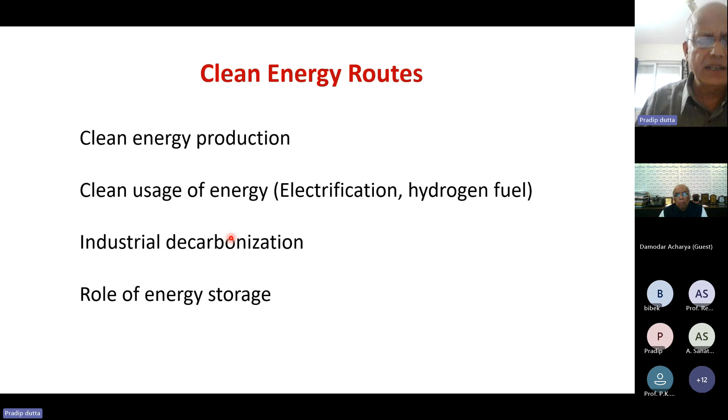Now, when it comes to clean energy production, from a universal point of view, there are these COP meetings held every year. One meeting, COP 29, got over just last week in Azerbaijan, and this was COP 28. Resolutions are taken, agreements are signed, and at COP 28 in 2023 in UAE, the resolution was the beginning of the end of fossil fuel.

So this was, and there was an aggressive push for renewables, and a target date has been set for phasing out fossil fuels. And even in other conferences, like the Solar World Congress held in Delhi last year, there was a special roundtable theme called 'Moving the World Towards 100% Renewable Energy.' Now, all these are easier said than done, that shifting from the usual energy sources to the completely renewable energy source - it's not so simple.

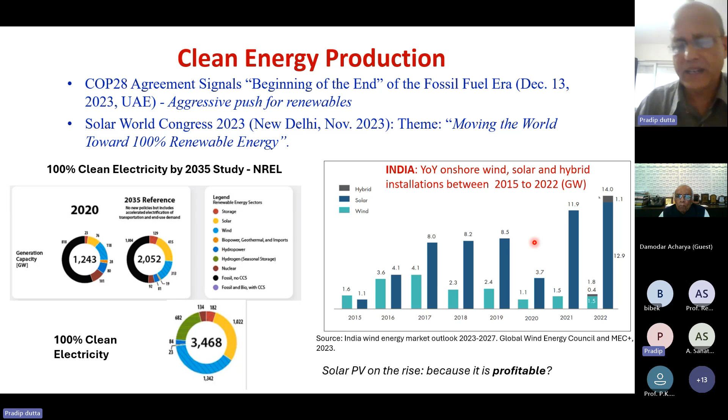Now, what is the real cost of renewable energy? Because what we've seen here, it's just that because the cost of solar panels went down, the investments went up. Now when we talk about cost, we should not forget what is the real cost of renewable energy, because the real cost is not the cost that we are paying. Of course, the source of the energy is free.

Now when we talk about cost of renewable energy, the governing principle comes from our good old second law of thermodynamics. Why does that happen? Because energy is not just energy in terms of watts or joules or kilojoules - it has a quantity as well as a quality, which means there is a grade. With renewable energy, because of the very low intensity of solar radiation or wind speeds, they are classified as low-grade energy and electricity. To convert them to electricity, which is the highest grade of energy equivalent to work - because it's in the form of work that we use electricity in vehicles and other motive applications - we have to convert from low grade to high grade. So the efficiency can be quite low, limited by the second law. It's not just in thermal, but in every other way - the same principle applies differently.

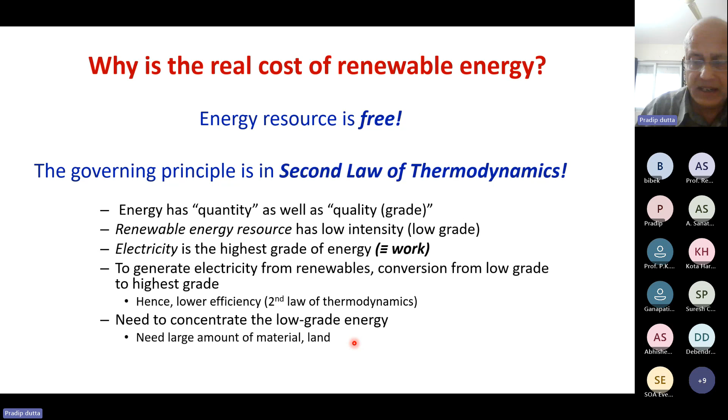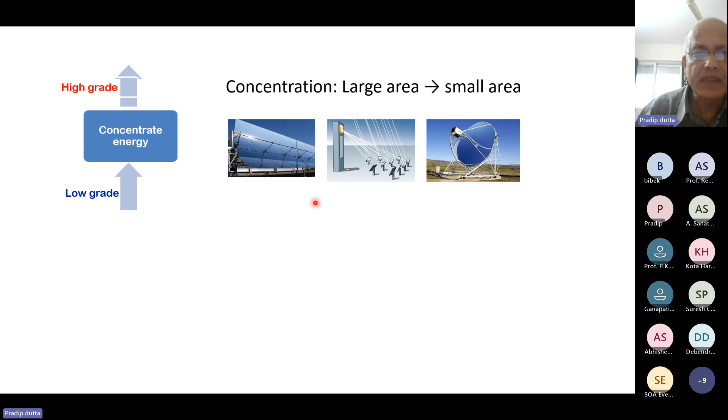So we need to concentrate the low-grade energy to convert it to high-grade energy. This requires large amounts of land and large amounts of material. For example, in solar thermal, it's easy to understand concentration: we have low-grade sun's rays, and we concentrate the energy to bring it to high grade, meaning we use big solar collectors. High temperature is produced, and that high temperature is used to generate electricity, the highest grade of energy, with some factor called efficiency.

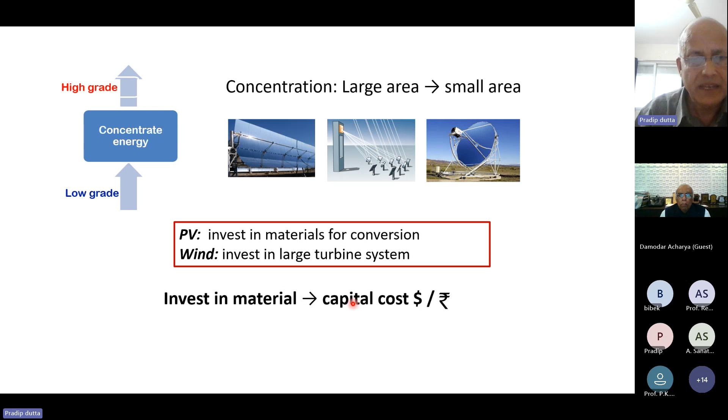The same thing applies in photovoltaic - we're converting low-grade solar photons into electricity, so we have to invest in materials for the conversion. Similarly, with wind, we invest in large turbine systems which catch low-grade wind energy and convert it to high-grade by concentrating it right where the rotors are. So we need to invest in material, and this gives rise to capital cost, in dollars or rupees or whatever. It is this capital cost which determines the cost of the energy that we are paying for.

When we evaluate energy cost, we use what's called levelized cost of electricity. For fossil fuel, it is mainly driven by the cost of the fuel and less by the cost of the infrastructure or power plant. Whereas for renewable energy, the fuel cost is zero, and the running or operation and maintenance cost is much lower compared to the initial capital cost, since you have to invest in the material. So if a plant is designed for a life of about 25 years, the cost per unit of electricity we pay today is the levelized cost over the entire lifetime of that plant. That's what we have to keep in mind, as far as cost is concerned.

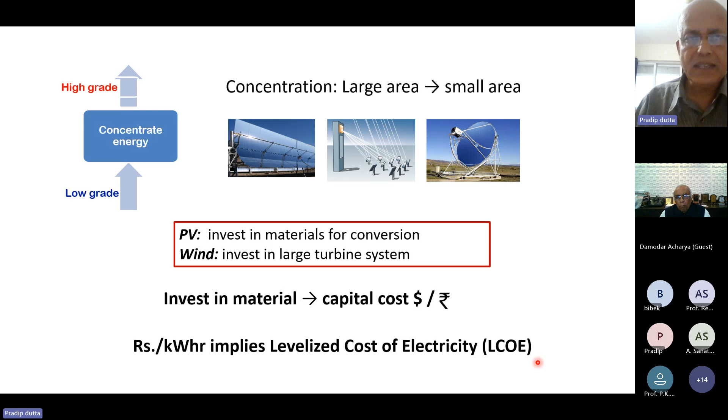Now, if you look at how the levelized cost has changed since 2009, solar panel cost was quite high at that point, because solar PV was expensive. In fact, wind was much better, and solar thermal was actually more attractive than solar panels. But around 2011, mainly because of scaled-up production in China, efficient supply chain management, and subsidies given, without any real new technology for solar PV, a well-proven polysilicon based solar PV was scaled up. This brought down the cost drastically. Of course, their planning had started at least 10 or 15 years before this.

Once the price dropped, investment in solar panel based big PV plants picked up, and that is where we are today. Wind has been steady in that sense. So what this means is that the trend where the world is going is based on the levelized cost of energy. But what is the real cost to the environment? That is rarely taken into account.

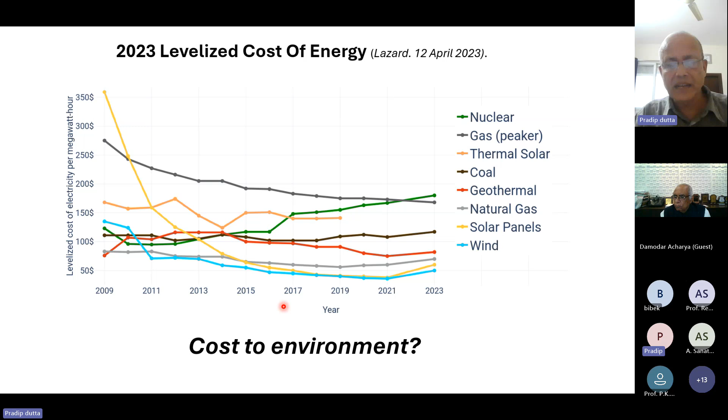One metric of sustainability is energy return on energy invested. There are other metrics as well to evaluate the sustainability part of it, not just the cost we pay out of pocket for energy. Energy return on energy invested is the energy that a plant delivers over its entire lifetime divided by the energy required to deliver that energy.

When we say energy required, it means right from mining of silicon, processing, all the way to production of the panel, and then the entire circular economy, including recycling. That is the energy required over its entire lifetime, based on a life cycle analysis. This is compared with the energy that is delivered over the lifetime. So anything more than one means it has delivered net energy.

But more than one is not enough, because then the whole exercise is a zero sum. This EROI should be much more than one in order for it to be a successful and sustainable energy source. We need this EROI to be much more than one.

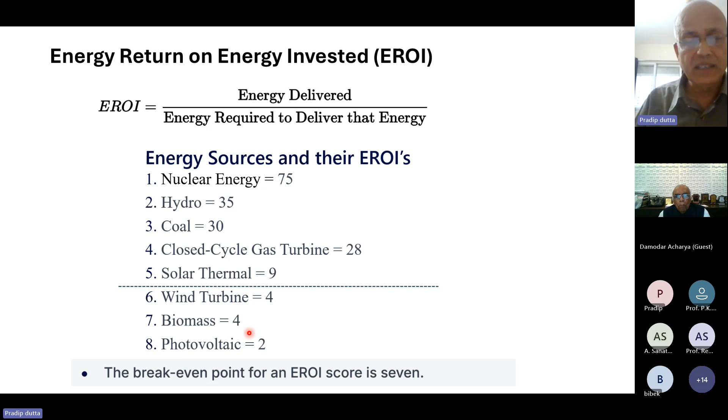The break-even point from what social scientists analyze should be 7 or more, which means these score much better. But we are now moving on with the others, because the LCOE, the levelized cost of energy, is proven to be better in this case.

Going back to this LCOE, levelized cost of energy, if you look at nuclear, it is quite high and going up, largely because of environmental regulations and because it is not well scaled up in the supply chain. So this has to be pushed up. In our union budget declared this year, there was a big push for small modular reactors.

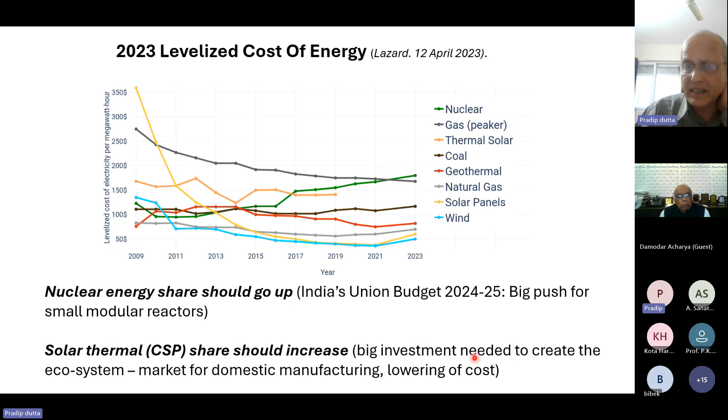Worldwide, many countries are thinking of increasing the nuclear share in their energy mix. Now, solar thermal is another one which should increase, but it needs big investment. It does not necessarily need new technologies, but new technologies can improve performance. It needs big investment like what PV had, to create the ecosystem and market for manufacturing to lower cost.

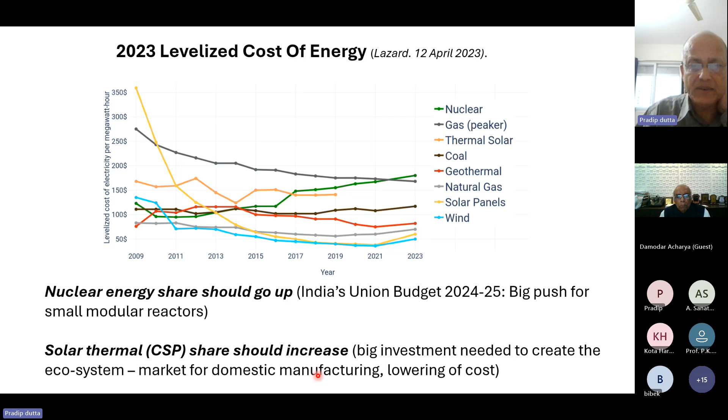And already China has started that initiative. In the past 7 or 8 years, they have been working on it in CSP, trying to replicate the PV story. This is not very well known to everyone, but if one looks at this...

Source is NREL, they have shown in their document that there are many plants coming up in the Gobi Desert of China, where it is quite cold and the solar DNI is quite high. So it's an ideal combination. What they are doing over there, instead of creating a big solar thermal power plant on its own...

From a cost point of view, solar PV is quite beneficial. So the large part of the plant is actually solar PV, and a smaller component, but with nearly about 24-hour storage. So PV is without the storage, and this is with the storage, right?

So what you see as 100 megawatt is actually producing energy 4 times that compared to, I mean, the nameplate energy capacity here is 600, but it will produce 600 without the storage, which means only 1/4 or 1/3 of the day it's operating, whereas this will be 24 hours.

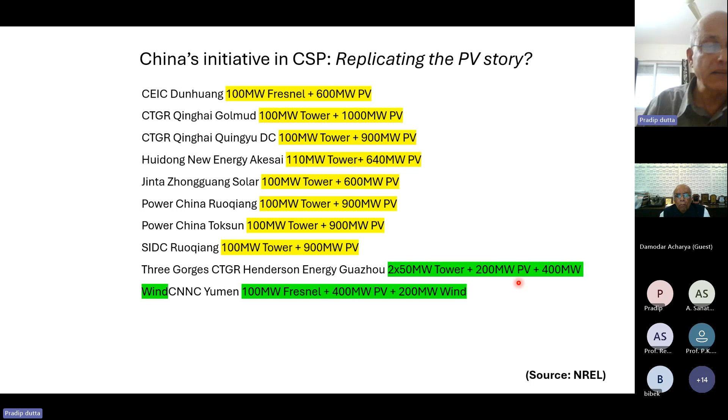With that, let me shift a little bit of time to spend about our own research at IISc, which we have been doing towards solar thermal.

Just a few slides on a new power cycle, the supercritical CO2 Brayton cycle. This basically is a new cycle of power plant to replace steam-based power plants, for higher efficiency and modular in nature. They are scalable and ideally suitable for nuclear, solar thermal, and waste heat recovery. One can have higher efficiency, smaller footprint, lower cost, eventually when it is productionized. So these are the advantages.

So we have built - Professor Pramod Kumar, who is also a fellow, has developed this in his lab. It's the first fully working Brayton cycle test bed for supercritical CO2, in fact the only one in the world which is working end to end.

Otherwise, in Sandia National Lab, they have only the compression part which is working. And there are other parts in the world, like Australia, Germany, they are working only on limited parts of the cycle. But this is the first fully working Brayton cycle test bed, and an important part of it was the development of turbo machinery.

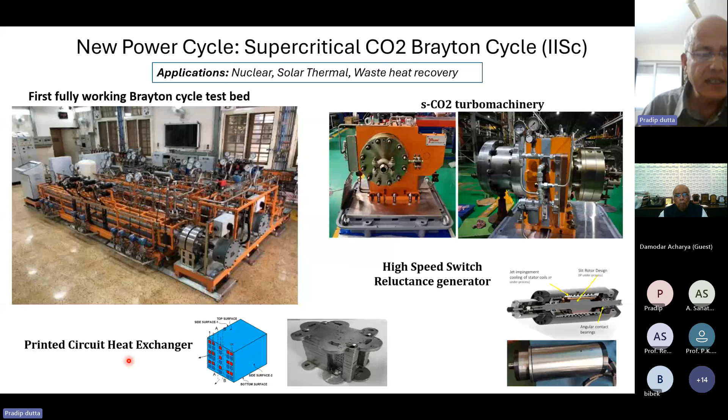The corresponding generator has also been developed. It's a switch reluctance generator. This was part of the IMPRINT project.

Also developed were printed circuit heat exchangers, which are required for supercritical CO2 Brayton cycle. There are only two manufacturers in the world: one is Heatric in UK, and the other is Vacuum Process Engineering in US. The cost is very high when you want to order anything from them. Now that has also been indigenized with the help of support from DRDO and other agencies.

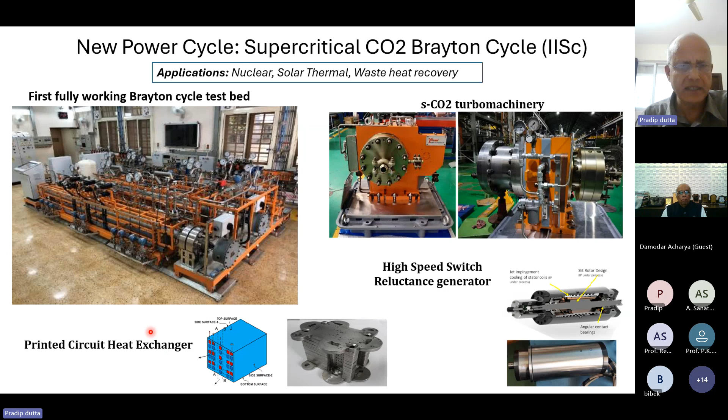That manufacturing process has also been developed, as well as the design process of such heat exchangers. So these are some of the ventures, and also the high temperature receivers.

We also had some projects under the Indo-US program, and then through MNRE, we have developed a high temperature, high flux solar simulator. This is a high flux solar simulator with a concentration of nearly 500 to 1000 that can be achieved. It's only about 2 kilowatts of heat generated here, but with concentration.

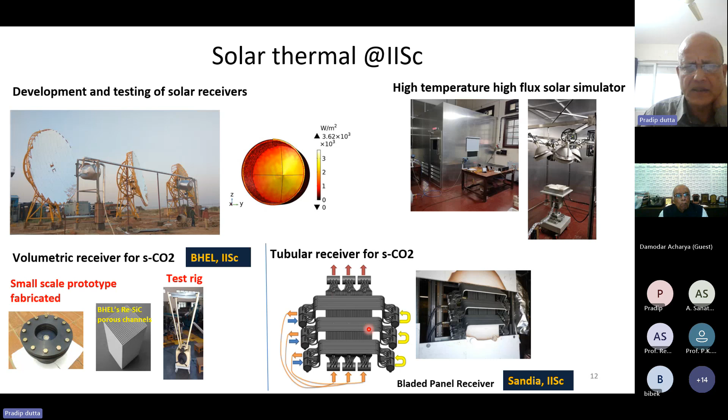And then with BHEL, we have developed high temperature solar receiver material. These are ceramic based. And with Sandia National Lab also, these supercritical CO2 receivers. With BHEL, we have also developed other receivers at IISc. I will not spend too much time on these right now.

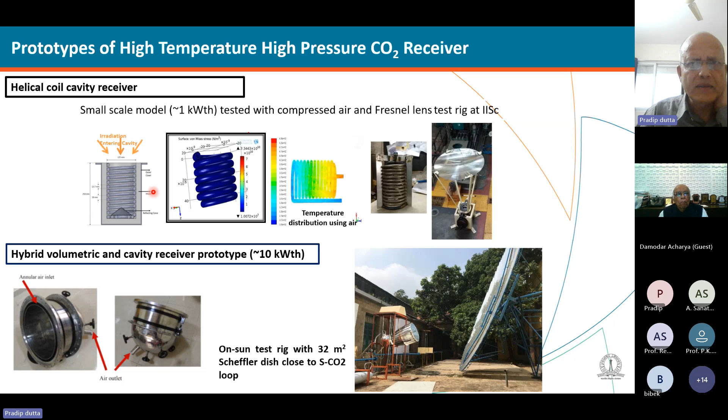But with BHEL, we have also developed high temperature thermal storage systems. These are also ceramic based, using natural mineral-based materials like mullite, and they have been tested for charging and discharging. So these are some of the things that we've been doing.

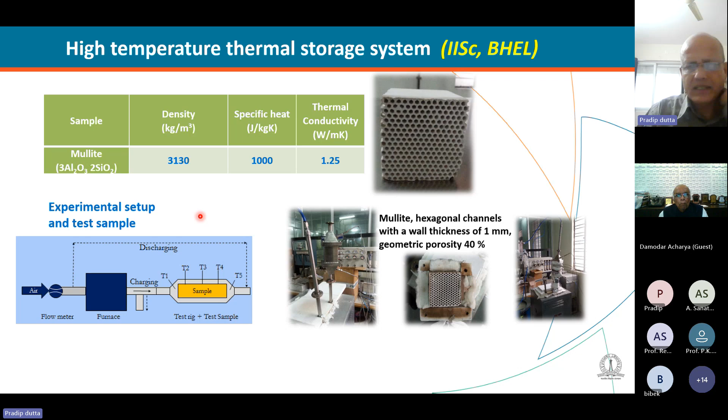So when you're talking about energy decarbonization of the industry, this is another big opportunity for core sector engineers, especially for Indian industries. We have started the process, but it's a long way to go now. So the processes, something like a steel plant for instance, moving from a carbon-based approach like the coke-based one, to something like hydrogen or electric arc furnace at large scale, is a big change.

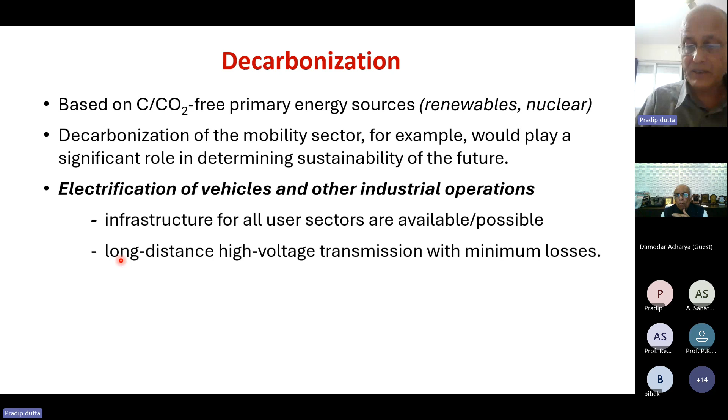The reason is that for electrification, the infrastructure for all the user sectors is available or possible. Long distance high voltage transmission is also there. So if you generate green electricity through renewables, it is possible to have access to that electricity at every place because of the infrastructure that is already there.

But when it comes to transportation, for instance, and we are talking about EVs, one thing I would like to highlight is what are the new opportunities. The shifting from IC engine vehicles to other forms like EVs or hybrid EVs doesn't necessarily mean that an engineer like a mechanical engineer would lose jobs, because this is the kind of notion that has been there, and as a result young people are suddenly thinking that they have to leave their field. But actually, more such opportunities are coming.

Because if you see the advent of electric vehicles, what we need is basically the development of electric drives and power electronics. This is predominantly for electrical engineers and electronics. But the vehicle engineering is predominantly for mechanical engineers.

Structural engineers are also there, thermal too. In EV, there is a big role for thermal management, and that's something we've been working on for the past few years.

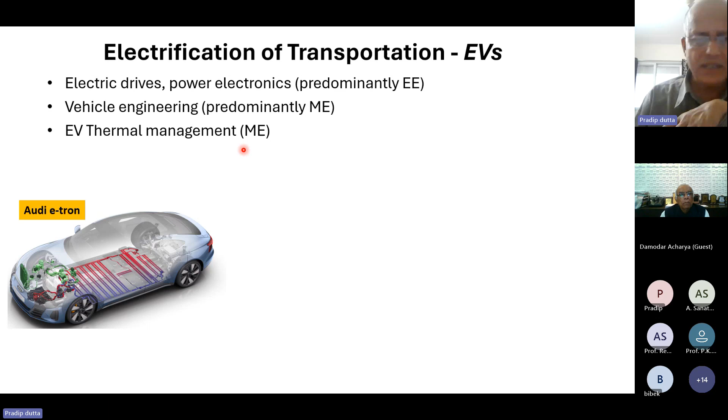For instance, if you look at a common architecture at the system level, this entire thing is not just thermal management, it's basically energy management. Because storing all the energy in the battery is one thing, but how the rest of the vehicle uses it, from cabin cooling and heating, to battery cooling and heating, to powering all the systems, is another. So there's a system level energy management, and at the component level, one has to develop new types of heat exchangers, pumps, compressors, fans, valves, and the controlling system. So this has actually given us more work than before, opening up new opportunities.

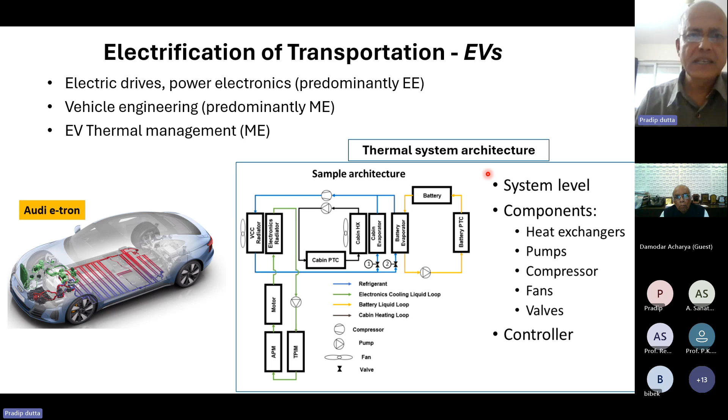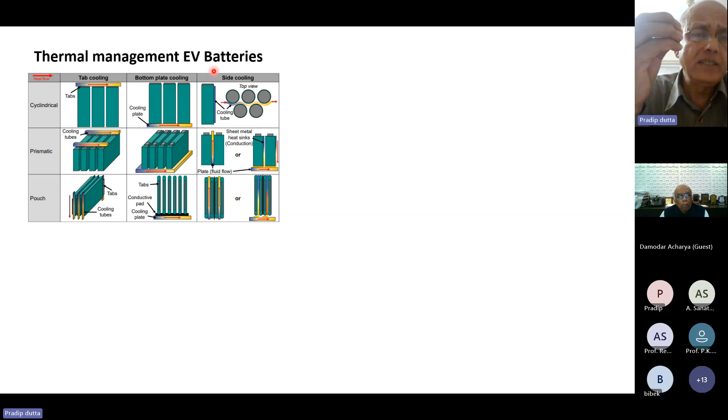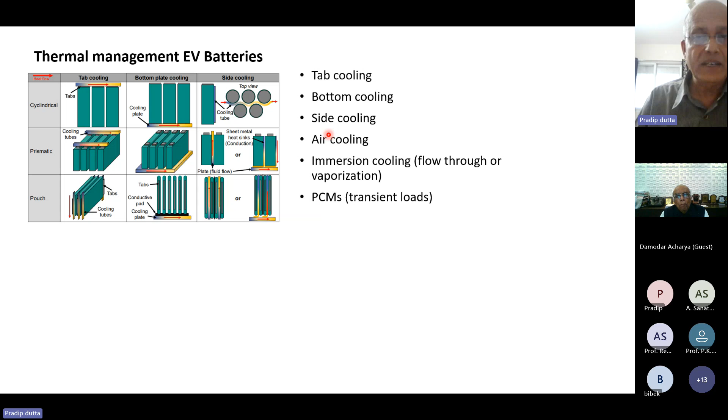So we have thermal management, not just of the batteries. When people talk about thermal management in electric vehicles, the normal initial thought is that the batteries have to be cooled. Yes, there are a lot of opportunities to work in this field for battery thermal management, with many different types of cooling systems invented, and so much to learn there, using other technologies laterally.

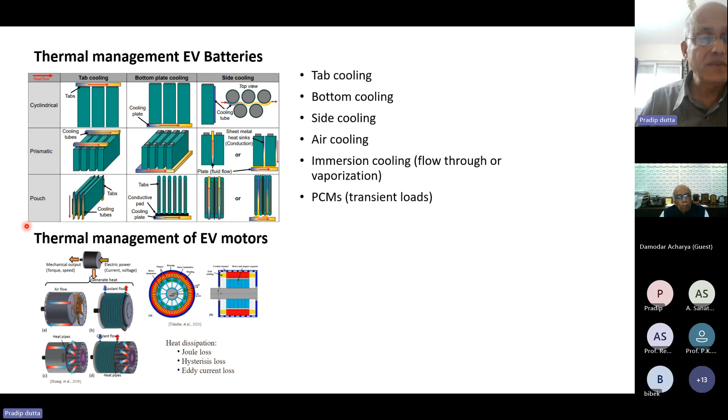But thermal management of EV motors is also quite big now. This was not a big problem earlier because the motors weren't that powerful. Now, because of the kind of duty cycle demand, the motors have become quite powerful, so thermal management of the motors is also a big challenge.

And thermal management of the power electronics goes side by side, because earlier in vehicles the power electronics thermal management was not a big problem due to its limited usage. But now in EVs or hybrid EVs, the control system is quite stringent and elaborate, so the power electronics challenge is also quite big.

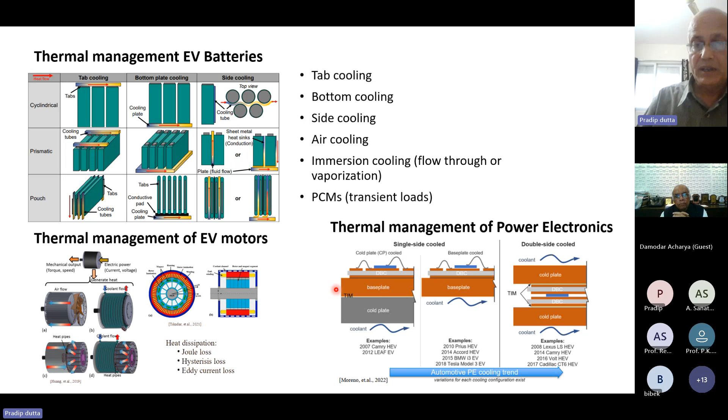We already have some projects which I will show. This is a thermochemical energy storage system for EVs, which I will describe in more detail. For the batteries, it is not just cooling - you will also need preheating of the batteries in cold climates before a vehicle can start. So this is basically a heat energy storage system, an on-demand heat energy storage system for battery preheating that we have proposed, and this system is nearly developed.

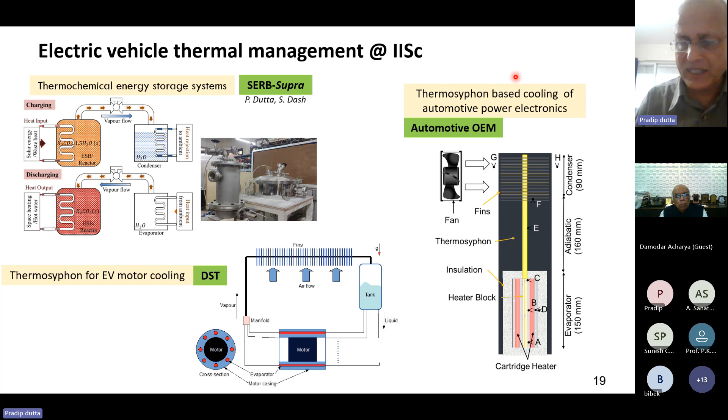Then there's use of passive cooling mechanisms like thermosyphon for EV motor cooling - we have one project on that. And from an automotive OEM industry partner, we have another project on thermosyphon based cooling of power electronics. So there are many such inquiries coming up now which were not there before. We are actually becoming busier than before with this shift of energy usage from one type to another.

Now, while we are on the subject of EVs, a long-standing problem has been energy storage in EVs. There is no doubt that the future will be electric transportation, and that has already happened in trains. It may also come to buses and other vehicles. In a small way it has come now, and the main reason is zero on-road emission.

But the question is, when we talk about EV, we automatically think about full battery EV, but that may or may not be sustainable. Nevertheless, electric transportation is something that can stay. Why this may not be sustainable is because scaling up battery storage in the battery electric vehicle is a problem. For instance, a typical four-wheeler requires 500 kg of lithium-ion battery - not 500 kg of lithium, but the battery weight is nearly on that order.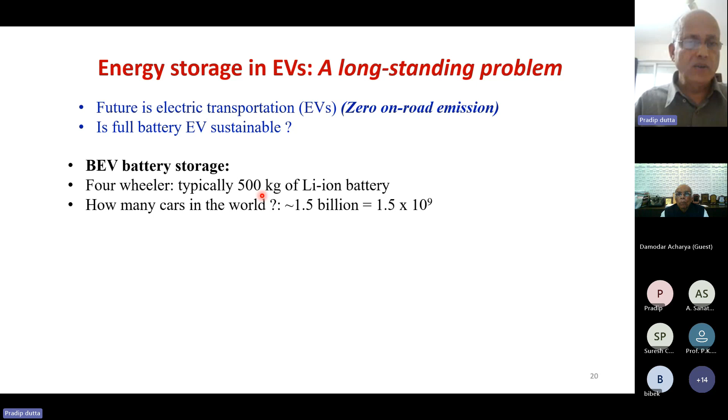Today in the world there are billions of vehicles. If we set a target that all vehicles will become battery electric vehicles in the next 10 or 20 years, imagine it will be trillions of kgs of battery. And these batteries have a life of only a few years, maybe 5, 7 years or more, and recyclability is not so easy. So right from mining these materials to production of batteries, then recycling, all at the scale of trillions of kgs every few years, is a humongous exercise - how much resource availability and how much environmental issues will be there. Unless we do a scaled up analysis we will not be able to tell. It is just like the case of IC engine vehicles.

When it first came up 100 years back, fuel was supposedly clean because the scale was so low—when it replaced horse-driven carriages, roads were no longer smelling of horse dung. So people thought it was cleaner, but it's only a matter of time before it's scaled up. Even CO2 as an emission was not seen as an enemy until the 80s or 90s, or even until IPCC brought out its report in the early 2000s. Before that, emissions were limited to NOx, carbon monoxide, sulfur dioxide, and so on—rarely did anybody talk about CO2. But when it's scaled up, not just in vehicles but other industrial production mechanisms, that scaling up causes the environmental problem. That's when we realize.

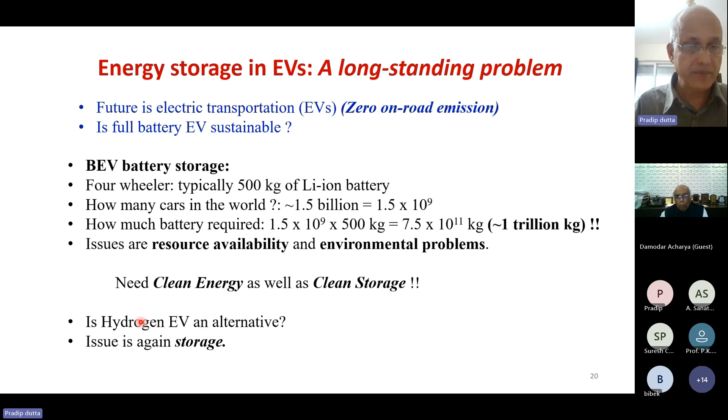But the issue again is storage. Hydrogen storage is a big issue. So in summary of this part, what we can say is electricity cannot be stored in large quantities easily, because especially for big power plants—gigawatts of power plants—we cannot have gigawatts of batteries. Then really we'll go to some other problem. To solve one problem, we'll create another problem.

Clean fuels such as green hydrogen can be easily stored. So indirectly, we are storing the electricity, because green hydrogen can be produced from clean electricity. So a term has been coined called power to X, P2X route, where power is basically the electricity source, which can be clean, and X is the fuel.

This fuel can be hydrogen, the primary extract by electrolysis. But one can also produce it through other routes—methane or ammonia, which can be more easily stored, or ethanol from biofuel. Methane and ethanol can be produced from bioenergy, which is also labeled as clean. So these are the routes by which clean fuel can be generated and stored from renewable sources.

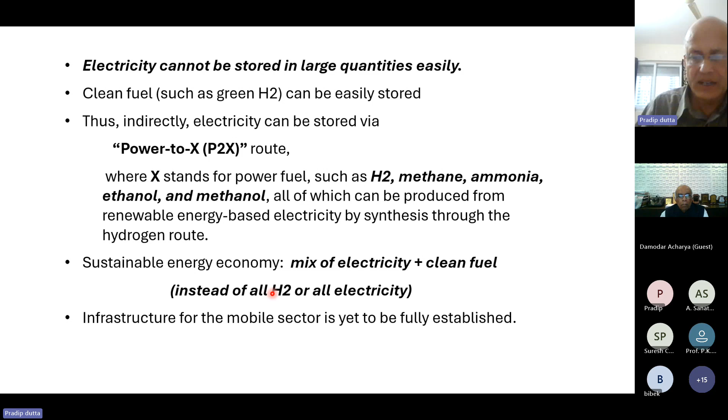Now, when it comes to R&D opportunities, the entire hydrogen economy or hydrogen energy technology involves production, distribution, storage, and utilization for energy, and we have opportunities for contributing in so many different ways. In production there's electrolysis, thermochemical cycles, and so on, and CO2-free energy sources—renewable energy, nuclear energy—so many options are there.

In transport and distribution, so much development needs to be done in pipelines and compressors, because this kind of fuel needs to be transported over hundreds or thousands of kilometers, the way we do for oil or natural gas. So we need to build this kind of infrastructure, and a lot of R&D is required. It's not that easy, because hydrogen embrittlement studies, corrosion studies—many things need to be done.

And utilization also, in the form of IC engines or fuel cells—especially a hybrid vehicle with this, or a direct IC engine based, clean fuel based engine. So there's a kind of hydrogen cycle or energy cycle: renewable energy sources or nuclear sources can produce the hydrogen, then it can be transported and stored, and finally there may be combustion or conversion in some way or another.

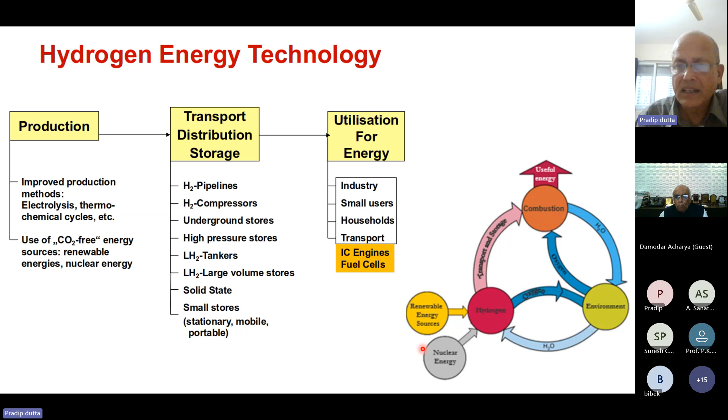When we do that conversion or combustion, water is produced, which again goes to the environment. Then we take water for electrolysis of the hydrogen. So this is a hydrogen and water cycle, a sustainable cycle that can be built. So these are just some ideal ways of looking at it.

Now coming to this green hydrogen, which I didn't talk about much, this is also a new opportunity for core engineering disciplines. It is not just electrolysis, which is basically the field of chemists. Even fuel cell or electrolysis, they are just the reverse of each other in terms of technology. You need the same kind of materials to be developed. There's so much scope on the system level design.

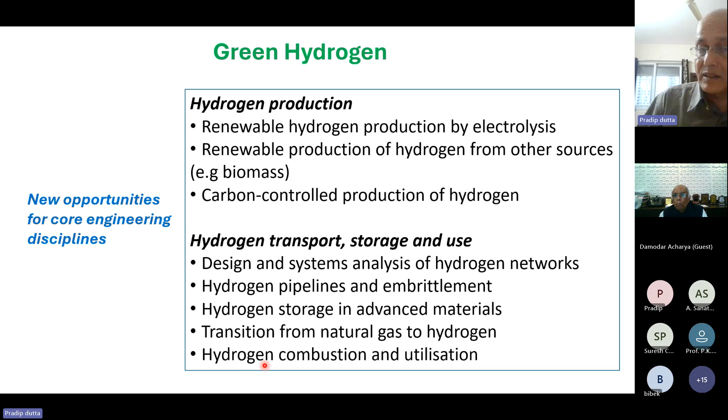In hydrogen production, we have renewable hydrogen production by electrolysis and hydrogen from other sources like biomass and carbon control production of hydrogen. Then on the transport side, design and system analysis of networks, pipeline storage, as I was talking about, transition from natural gas to hydrogen. Also, there's quite a bit of R&D which needs to be done. Combustion of hydrogen, engine is not so easy to make, so quite a bit of R&D needs to be put in there as well.

Now, when you're talking about green hydrogen, the normal way of producing it is you take the clean electricity, which is from renewable or nuclear, and this is a solid oxide based system, as an example, and it requires very high temperature - around 750, otherwise the yield is not much. Now what you do is, and also you need steam, right, steam here, and then the steam is heated. A lot of this energy that is required is actually to convert this steam into high temperature steam. Now, one thing we should not forget is that if so much energy is required here, all the focus should not be only on the clean electricity.

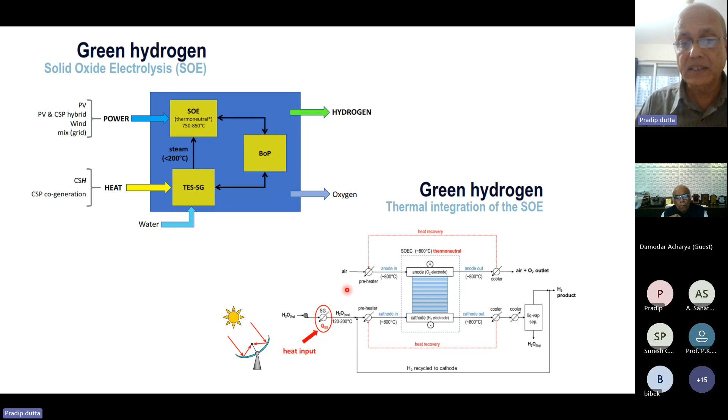We can actually get, and this is a proposal which has been implemented in some places, that from a solar thermal, that is CSP, cogeneration, you take heat as heat and then use it to generate the steam. So in fact, you can make a high yield green hydrogen by having both the PV or wind at the same time as solar thermal. So these are some of the things - this is a hybrid approach where heat input can come from solar thermal and the other electricity can come from PV or wind or nuclear.

Now at IISc, there has been some research. I'll spend a couple of slides on the production of green hydrogen through the biomass route. That is Professor Dasappa's lab, producing hydrogen and syngas from biomass waste. And so this is basically...

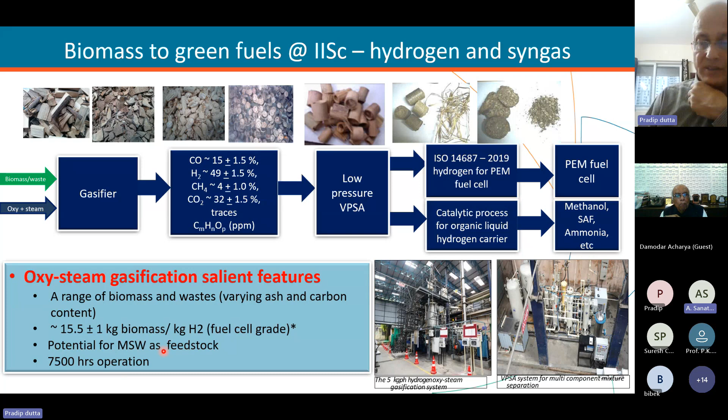The adsorption based pressure swing adsorption process, and one produces the PEM fuel cell, or it can be used to produce methanol, then fuel, aviation fuel, ammonia, etc. It can produce. So there's already a pilot plant in the lab to produce this, and potential for municipal waste also as a feedstock has been evaluated.

And in that lab, which is called the Combustion Gasification Propulsion Lab, there's biohydrogen research - quite a few projects which are on stream, and some of them have been funded by oil companies like IOCL and some multinational companies, and MNRE, of course, is one of the main contributors towards this.

And then on hydrogen storage technologies, there's physical based storage which is well known, that is compressed tanks, very high pressure like 350 bars, which is type 3 maybe, and maybe 700 bar for type 4 tanks, cylinders, composites there.

Then liquid hydrogen or cryo compressed hydrogen. Now these require very low temperatures. This requires very high pressure. And then there are material based storage, which are the sorbents, metal hydride. Conventionally they have been used, but they have not been that successful, mainly because of the small weight percentage of hydrogen storage. So it becomes bulky as well as heavy.

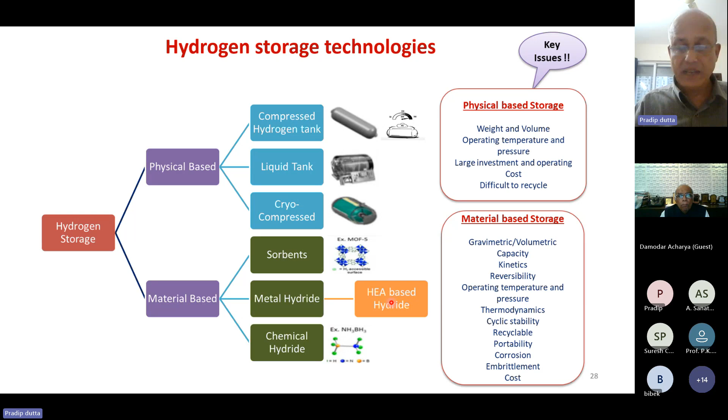Now there are new types of materials which have been invented, the high entropy alloys. There the weight percentage can be reduced, and also their operating temperatures can be tuned for operating at room temperature, near room temperature. So then they will have a clear advantage. So that is another type of work which is going on in many places - material-based storage using high entropy alloys, or maybe other sorbents with very high surface area, like MOFs, but they are quite expensive now.

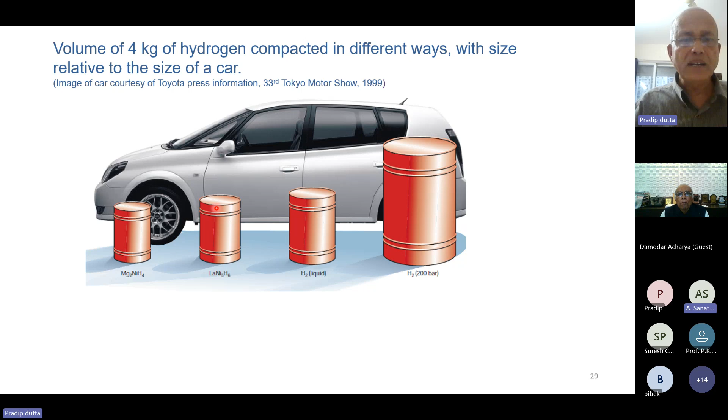So now let's look at the benchmark. So at one time, the benchmark was - if you take 200 bar, compress it, then this is too big to fit into the vehicle.

This is liquid storage, but the infrastructure for that on a mobile vehicle is very difficult. These are some of the metal hydride based systems, but they require high operating temperatures. And that is where the high entropy alloys come into the picture.

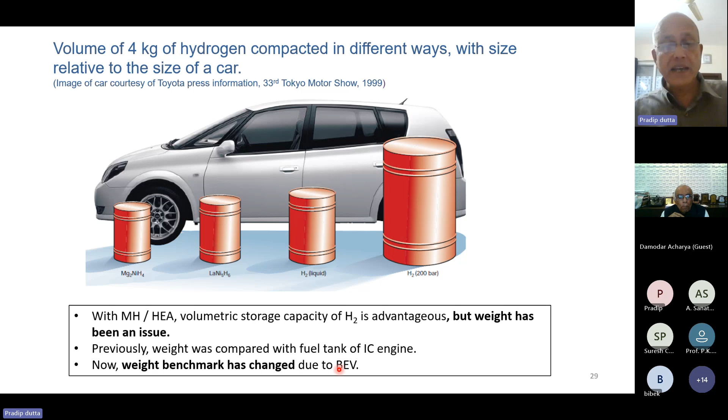So this kind of sizing can be done. Previously, the weight was compared with the weight and volume of a fuel tank of an IC engine, but now the new benchmark for weight has changed to battery electric vehicles, because vehicles are already carrying a huge amount of batteries.

Just as an example, this is a Tesla Semi, a full battery powered truck, with a range of 500 miles. Out of this roughly 20 to 25 ton truck, about 4.6 tons is actually the weight of the battery pack.

Now, if one had proposed 10 or 20 years back that there would be a material-based hydrogen storage giving that kind of range and weighing this much, it would have been rejected. But now this is the benchmark, so this kind of weight is accepted now.

If we do a calculation even with conventional metal hydride, which is not very good in terms of weight percentage storage, on the order of 1 to 2 percent, it still turns out to about 2600 kg to achieve a range of 500 miles. So there is scope now, if the material is improved beyond normal metal hydride, with better high entropy alloys or other higher weight percentage storage materials, it can be done.

So the key to success is the appropriate design of the reactor, the heat and mass transfer studies, scaling, optimization, and heat recovery technology. There is a lot of scope for R&D that can go in here. One cannot simply think of it and just put it together like that - it requires a lot of effort.

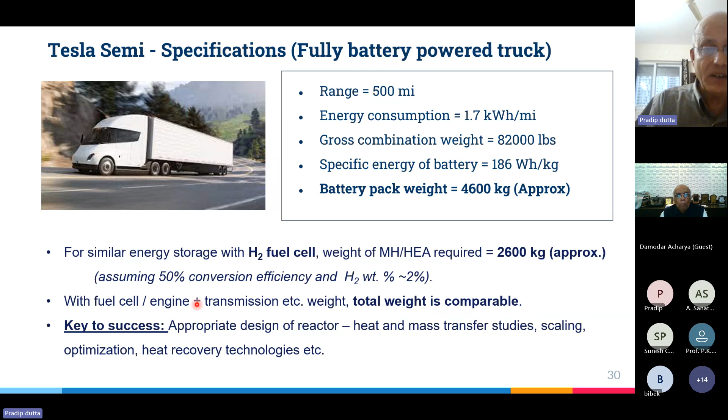Now I'll spend just a few more minutes on our work on thermal storage and sorption-based hydrogen storage. Since we are talking about material-based hydrogen storage, we started our work on thermal storage and hydrogen storage, and we are still working on it.

Now, when talking about thermal energy storage which is sorption-based, what is the main advantage? There are sensible heat thermal storages, because thermal storage is also an important part of this whole renewable energy based economy. Not just fuel storage, but heat storage is important in many applications, so we need to look at that as well, especially long-term storage.

Sensible heat storage is very old, and although the technologies are well developed, sensible heat means storage without any phase change, but the storage has to be done at higher than ambient temperature, and there is heat loss over time. So only for a short time can you store energy, because heat will leak out eventually, even through insulation.

Latent heat storage has a higher energy storage density because there is a latent heat associated with the phase change of the materials. These are also well developed, but again heat loss is an issue, so for long term it can't be stored, but for short term, a few hours, it is good.

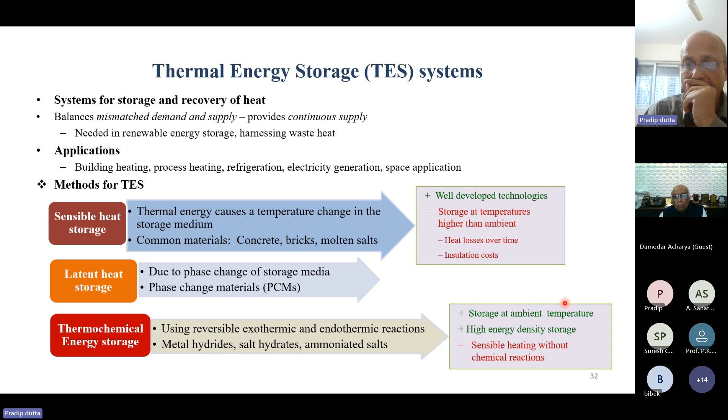There's another storage, which is thermochemical energy storage, which uses reversible exothermic and endothermic reactions. One can use salt hydrates, metal hydrides, ammoniated salts - there are many options. What one can achieve is not just high energy density storage, but storage at ambient temperature. Now, how one can store heat at ambient temperature is not very intuitive, and I will explain it here.

This is how it is done. The fundamental principle is that thermal energy is stored in the form of enthalpy of the chemical reaction. This means that when we have two substances combined into a compound or material, if you apply heat, through an endothermic reaction you may separate out A and B, and now you can store A and B separately. Then whenever you want, you can bring A and B together and it will produce heat.

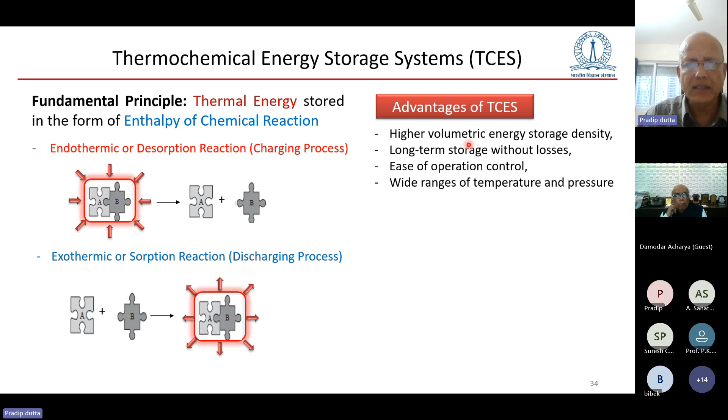It's an exothermic reaction. This sounds very simple, but the advantages include high volumetric energy storage density, long-term storage without losses, ease of operation and control, a wide range of temperature and pressure, and so on. There are many types of materials, ammoniated salts, salt hydrates - we have used salt hydrates like K2CO3, and we have also used metal hydrides in this work.

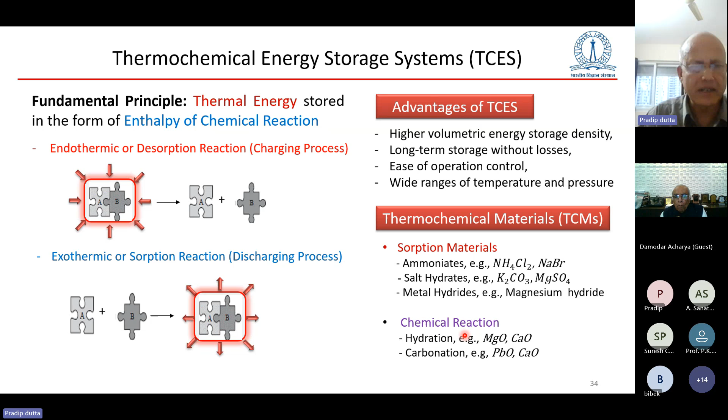And there are others that can be used, which are based on pure chemical reactions. Now this is easier said than done - how it can be done. The operating cycle, I'll explain how it is done.

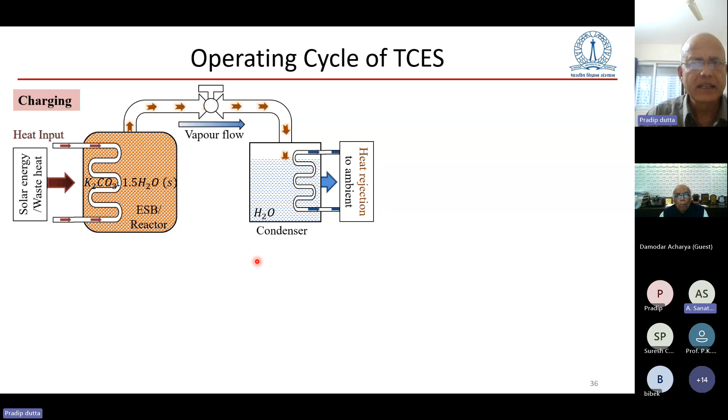So if you have a hydrated salt here, salt in the form of hydrate, the application of heat separates out the water vapor part, and the water vapor comes here, and then with ambient energy, or cooling, we can condense it and keep the water separately. This part of the cycle is called dehydration.

And then when we want the heat back, all we have to do is take heat from ambient, make this evaporate, and the water vapor comes back, forms the hydrate, and releases the heat. That heat can be taken away, whatever our usage, with a heat transfer fluid. So that part is called the discharging process. This kind of system we have developed.

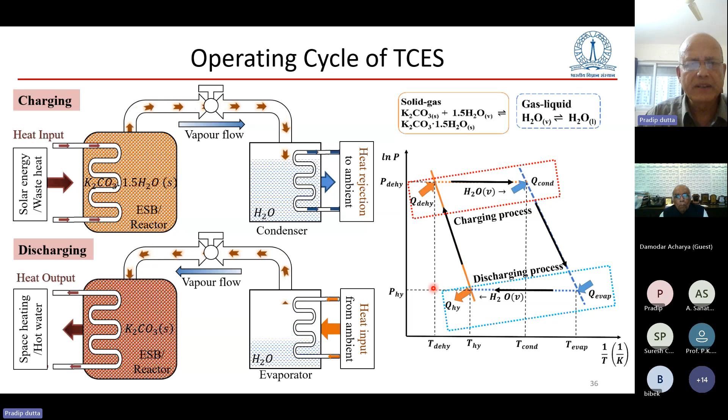Of course, the advantage here is - I'll skip this part because it will take longer to explain.

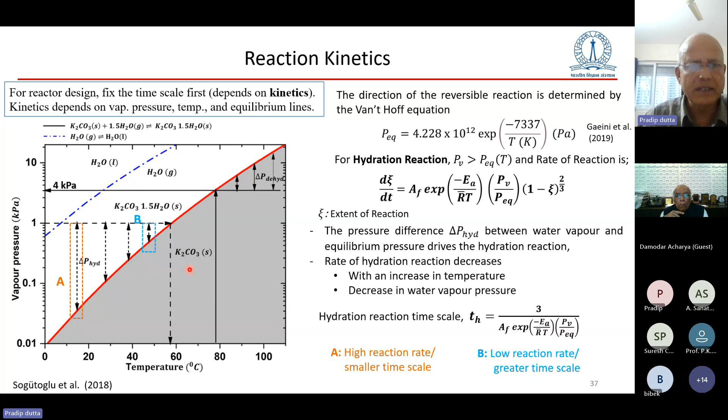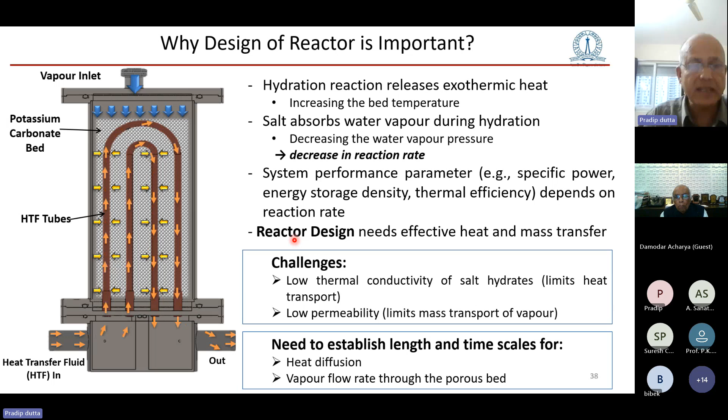So all the length scales, time scales - because kinetics is also involved, the time scale comes into picture since we need to design for a cycle time. So vapor flow rate through the bed, and we do CFD analysis, which I will quickly go over.

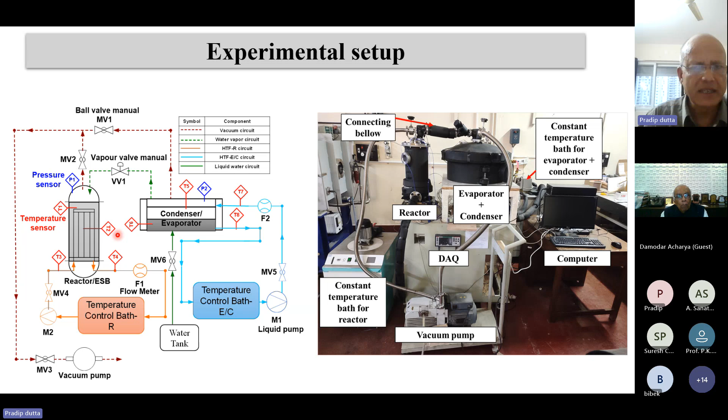And we have now created an experimental setup to prove this concept of energy storage by thermochemical means. So we have done our experiments.

So this is the source of heat that we use to store the energy. This is the dehydrating or charging process of the heat. And then when we wanted to discharge, we take ambient heat and recover the heat. We may not recover it to the same temperature as stored, because this depends on the ambient temperature, or the vapor pressure at that temperature.

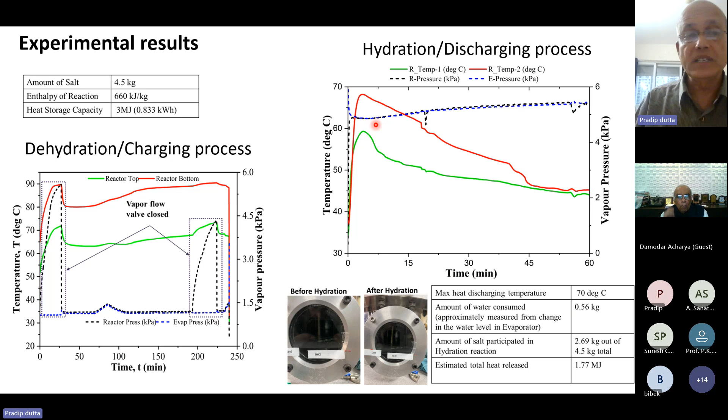Nevertheless, this heat can be stored over a long period of time and then delivered at the point of use whenever we need.

As I was mentioning, in the case of any electric vehicle thermal management system, they also have a heater, basically a backup heater to preheat the battery when the vehicle is parked in a cold climate. This heater is normally an electric heater, so you need to park the vehicle always at a garage or some other place where there is a plug point to operate this heater.

The battery gets preheated, and once it reaches around 10 or 15 degrees Celsius, the car can go. Otherwise, if you do a cold start, it can damage the battery even more than heating it. So for the battery, both low temperature and high temperature are not good.

So instead, with the present arrangement, all vehicles had to be parked in those places. But when we replace this with a thermochemical system, we can have an onboard thermochemical thermal energy storage system as an emergency heat source to preheat the battery and start the car. The advantage is the car can be parked anywhere without risk to battery health. This is not in any car now, but we are proposing something like this.

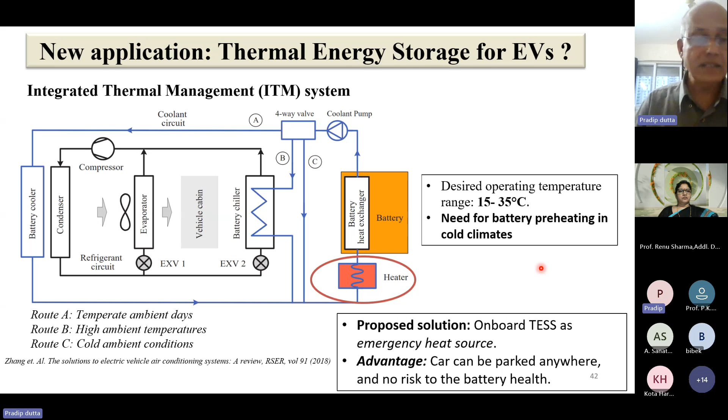The other project we have done, the last part, is a metal hydride based thermal energy storage and hydrogen storage. In metal hydride based storage, similar to before, when you apply heat to the metal hydride, the metal or alloy and the hydrogen get separated.

Now if you can store them separately, this hydrogen, and bring back the hydrogen, then it produces the heat. So this is from the point of view of thermal storage.

As a result, we need a wide range of materials and properties - high temperature materials, medium temperature, low temperature. For the hydrogen storage, we need low temperature or near ambient materials.

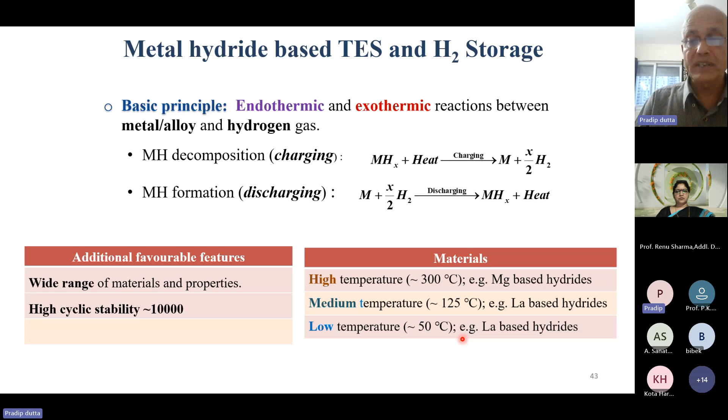I'll tell you why. Suppose we have this system where we apply heat, and the heat source can be from anywhere, from renewable to other waste heat. So the hydrogen gets separated out, and you need to store the hydrogen. If you store it in a tank, the volume required will be too high. So what we do is store it in another metal hydride, different from this one.

The advantage is that this low temperature metal hydride can release the hydrogen back even by taking ambient or near ambient heat, so that when the hydrogen comes over here, it produces the heat back. In this way, we have developed two types of systems: one is the energy storage, which is this hydride system, and the other is for hydrogen storage.

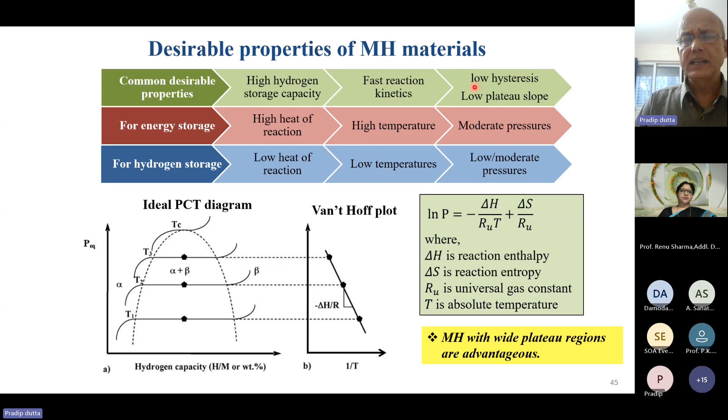This is the thermodynamic diagram, like Van't Hoff plots, used to calculate the properties required for energy storage, and the metal hydride required for hydrogen storage will be quite different. Because this one needs high heat of reaction, this one needs a low heat of reaction for hydrogen storage, since you need energy to discharge also. So this is the high temperature, fast reaction kinetics are needed also, and low hysteresis. These are some of the properties.

There are a variety of metal hydrides. So what we do is choose a system, one for the hydrogen storage, which is the low temperature material. This is 1 over T, 1000 over T, so temperature is decreasing in this direction, and this is the pressure. So this is the high temperature Van't Hoff diagram, this is medium temperature, and these are the low temperature ones.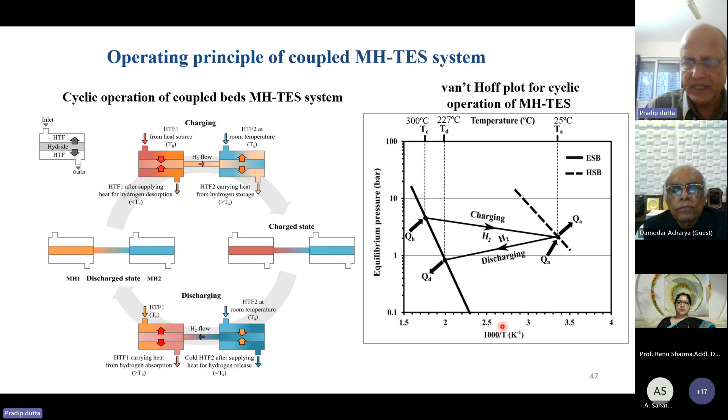Then in the discharging process, we bring in room temperature heat, and this is such a hydride which can dissolve even at room temperature. Then the hydrogen flows over here and combines, forms the hydride, and releases the heat. So this is the cycle diagram of charging and discharging, with 1000 over T on the axis, so temperature is decreasing in this direction, and this is the equilibrium pressure.

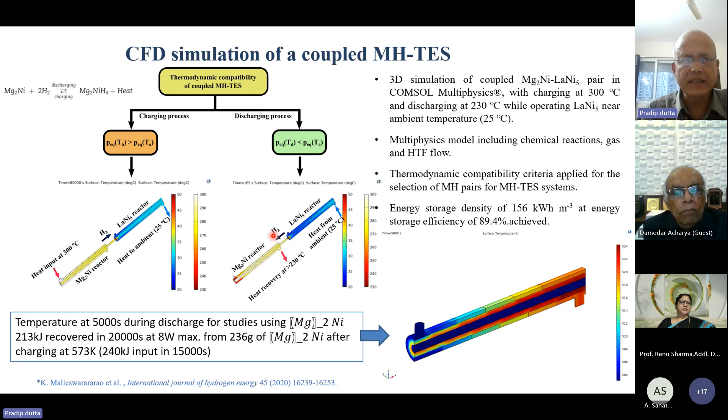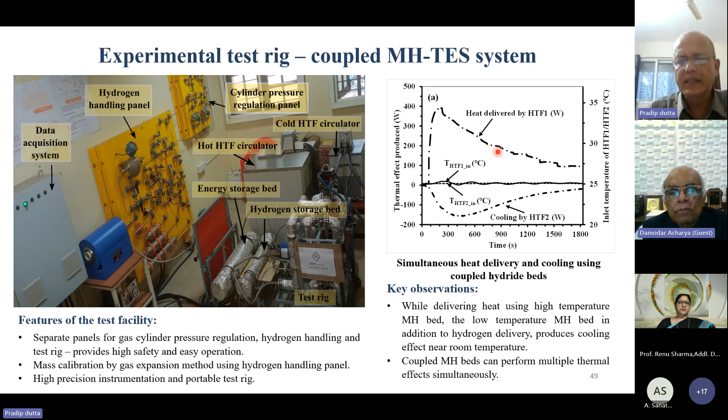With this cycle, we have done some CFD analysis of this two-bed system, one high temperature reactor and the lower temperature reactor. After doing the CFD analysis, we validated it experimentally, testing the system in the lab with a hydrogen storage supply facility. It agreed with the performance, how much heat got stored and delivered, which also more or less matched the theoretical prediction.

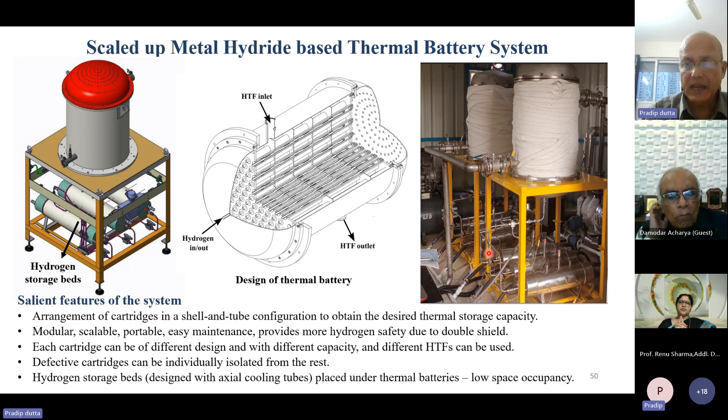This was supported by GAIL. They wanted a system for waste heat storage, a long-term waste heat storage system. So we scaled up the system, and did this project at our Chitradurga campus, where we had a source of solar heat to be used for the thermal storage. These are the two reactors, one high temperature reactor, the other a medium temperature reactor, and these are the reactors for hydrogen storage down below.

This is a full system where the initial source of heat is basically solar dishes, Scheffler dishes, which supply the heat, and it goes through a heat exchanger where, in the solar dishes, an oil gets heated, thermic oil. That oil-to-air heat exchanger we have, and then hot air we bring to these thermal storage reactors, this is a high temperature reactor, this is a medium temperature reactor.

So the hot air dissolves the hydrogen, and it comes and gets stored in these hydrogen storage beds, which are low temperature based metal hydride reactors. This is how the cycle works. When we wanted the heat back, of course heat is supplied to this, but here the grade of heat needed, a low grade heat like a little bit above ambient or ambient temperature, is good enough, and then we get the heat back over here. So this is the cycle that was proven, and it was delivered.

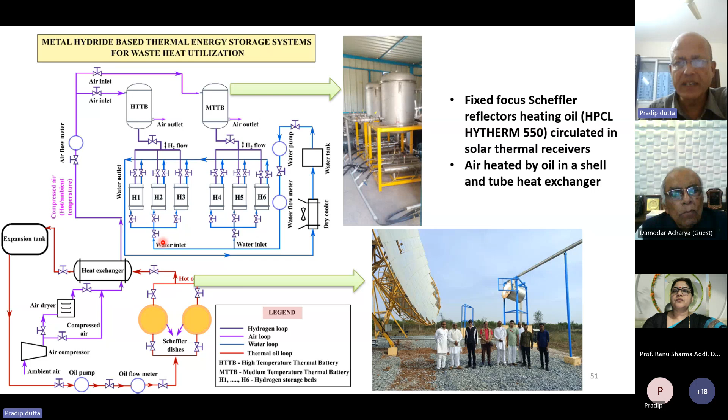Now the last part of it is, what are the opportunities in industrial process decarbonization, especially places where there are large number of steel, cement, and aluminum plants. This has become very important now in our country also. Quite a bit of work is getting started, but nothing much has happened yet.

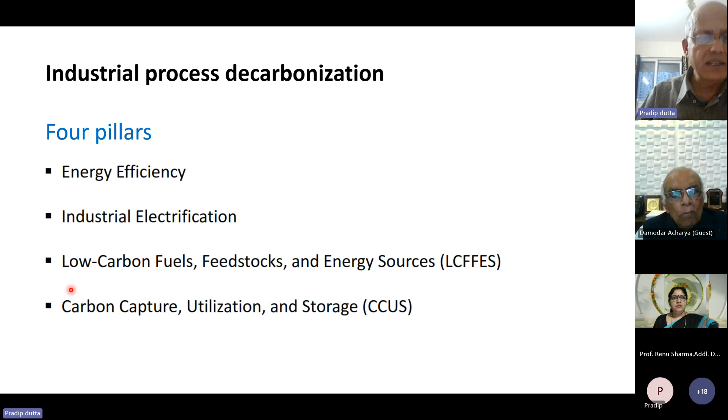So there's a lot of opportunities. The four pillars of decarbonization are energy efficiency, industrial electrification, low carbon fuels, and carbon capture.

What are the temperature ranges? A large amount of heat energy is actually in the low temperature range, up to about 300 degrees. And the high temperature range is basically iron and steel, aluminum, cement, and so on.

So what it means is that if we use electricity generated from renewables for applications which require such low temperature, then it is not a good thing from an exergetic efficiency point of view. But that's what's happening now, so that's where I think some corrections need to be done.

One can use heat captured from solar directly instead, which is better. For areas where high temperature is required, using electricity to generate the heat, or using fuel like hydrogen or any other clean fuel, is the appropriate choice.

Unfortunately, the way the world is moving, it is either all electricity and fuel based or nothing at all. We need to bring in heat as heat by some means for these kinds of applications, even in food processing.

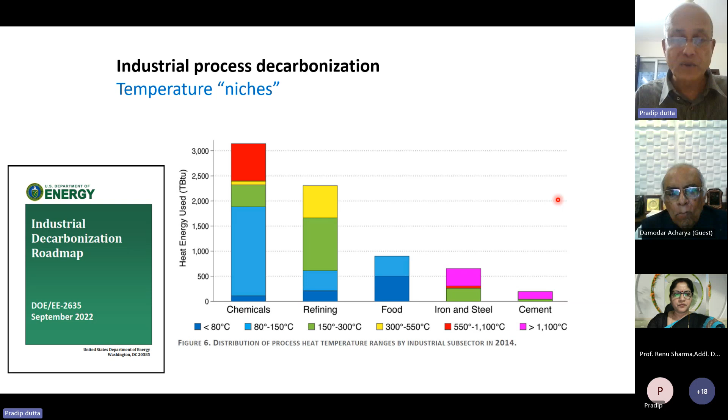In India, iron and steel decarbonization has become very important. The reason is that the European Union has already declared that unless the steel is produced by green means, it's not green steel, and tariffs will be very high. So obviously, to stay in the market, everybody needs to change over, and there's hectic activity now going on in many steel plants, including Tata Steel, to move towards decarbonization.

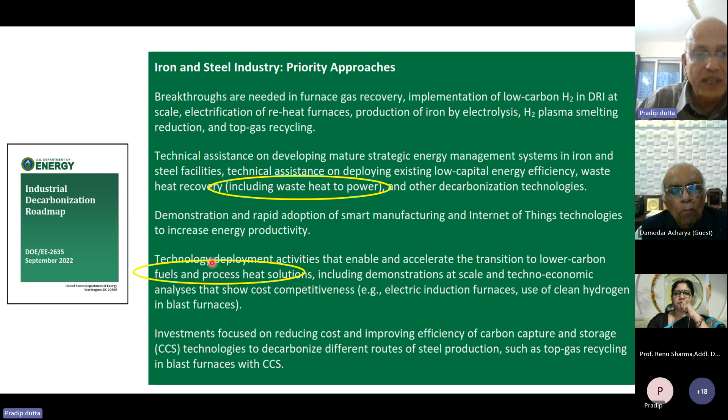That means we need fuels and process heat solutions, and we also need waste heat to power, because a lot of waste heat gets generated in steel plants and cement plants which can be made use of. So there are opportunities here as well.

Implementation of low carbon hydrogen in direct reduction of iron ore, DRI, also has quite a bit of scope.

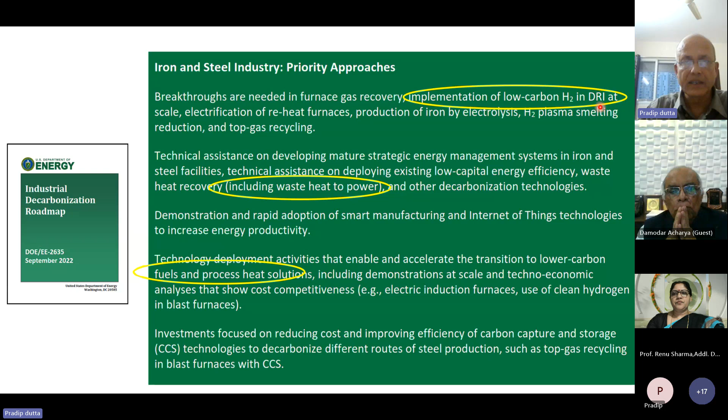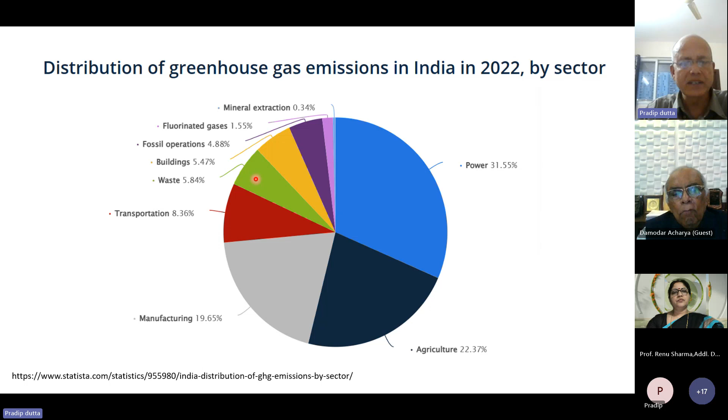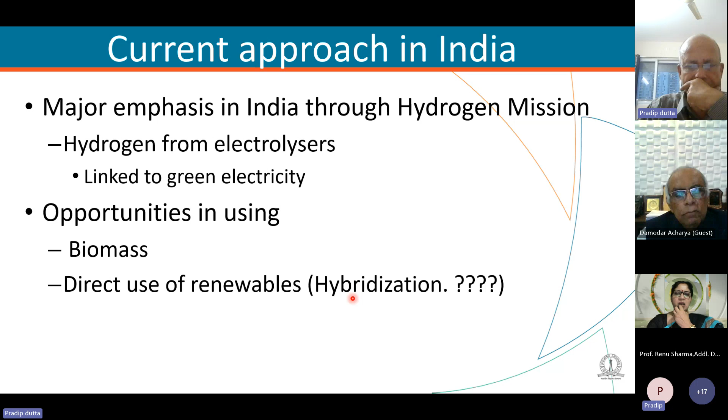The current approach in India is, of course, through the hydrogen mission—quite a bit of work is going on with electrolyzers, linked to green electricity. There's an opportunity for biomass as well, which is being looked at, and opportunity for direct use of renewables or hybridization. I think I'll stop at that.

To conclude, engineers must play a significant role in accelerating the shift to a sustainable future and low carbon technologies, using their knowledge to optimize renewable energy systems to maximize production efficiency and dependability. We need to use our ingenuity and technical know-how in the creation and use of clean energy solutions. So it's not a simple solution.

It's a complex web of things happening over there, and there's a lot of clutter, so a comprehensive view is very difficult to create. But we still should find sustainable solutions with cutting edge engineering, and work towards a sustainable future for the next generation.

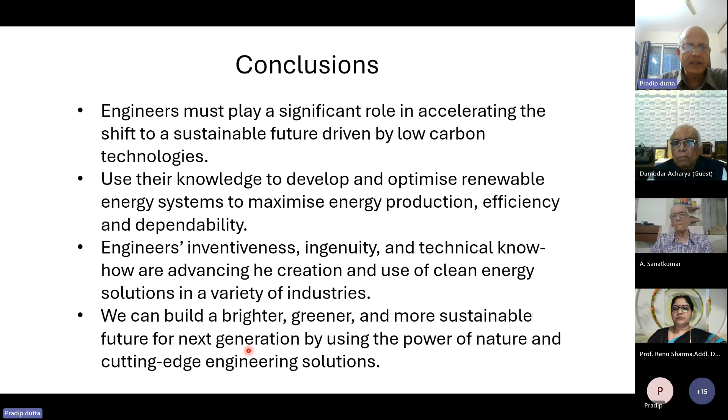Thank you, Professor Dutta, very much for your excellent lecture. I'm sure all participants would have really enjoyed it. Now we'll have a few questions and answers. Okay, shall I unshare now? Yes, yes, okay, thank you. Please, thank you sir.